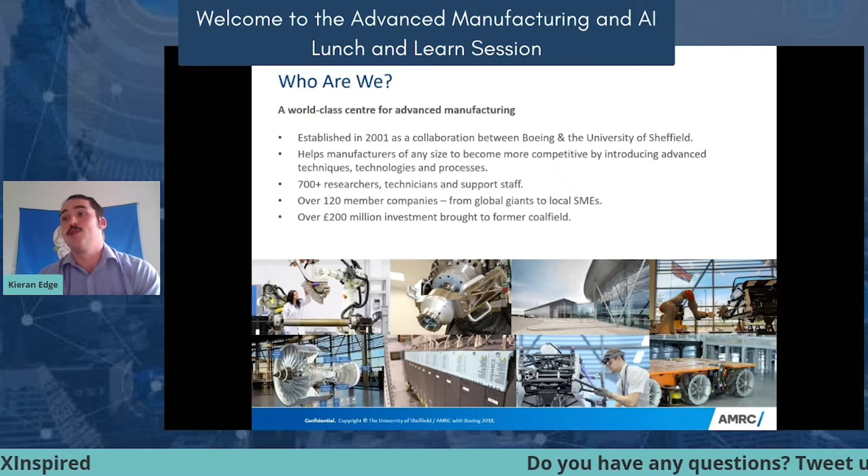We have over 700 researchers, technicians, and support staff, so a relatively large research centre. We have over 120 member companies, and we bring in over £200 million of investment to this former coalfield. It's Orgreave where we're based, so where the miners' strike took place, we reinvigorated the area and brought in new investment, new employers, and new research. We are also part of the Rolls-Royce and Boeing Global Research Network.

So this is why I want to give this talk today, because we collaborate with all these different companies doing all sorts of different applications in a wide range of industries, and we get a lot of feedback from these members as a part of it. So it's basically a dialogue, and what we've learned from this is what high value manufacturing and what advanced manufacturing wants, in terms of AI and in terms of machine vision.

So that's what I want to talk about today, because the purpose of the AMRC is to aid UK manufacturing. We're a not-for-profit organisation. We're here to allow manufacturing in the UK to grow and to develop and to become more advanced and more competitive.

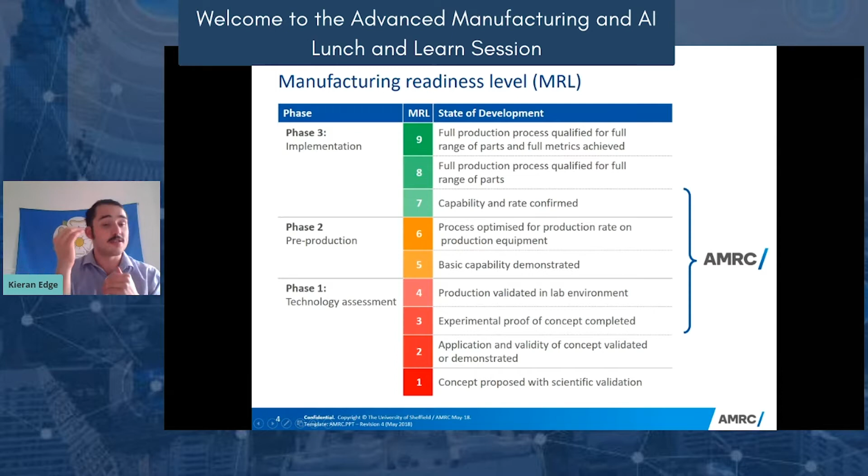And the way that we do this is by sitting in this sort of area here, as you're seeing in this slide. We sit in the gap between experimental proof of concepts in laboratories, so a technology being trialled and saying this is where we're at, is pretty much proven in a laboratory setup. And we're taking it through those next areas, so taking it through levels 4 to 7 in terms of making it more and more mature until it's ready to actually go into industry. That's where we work at.

And the way that we do this is by linking up with academia and with industry. So we'll have this low-level technology coming from academia and say, look, we're looking at doing synthetic data, for instance. We'll do R&D, we'll do proof of concepts, and then we'll work with system integrators, we'll work with software suppliers, and we'll work with the end users and industry in order to make the technology a perfect fit, in order to get it in there as quickly as possible.

So that's a bit of an introduction to who we are at the AMRC, what sort of experience and feedback that we get. And I'm going to go into the actual detail of that, and what high value manufacturers want from machine vision and AI.

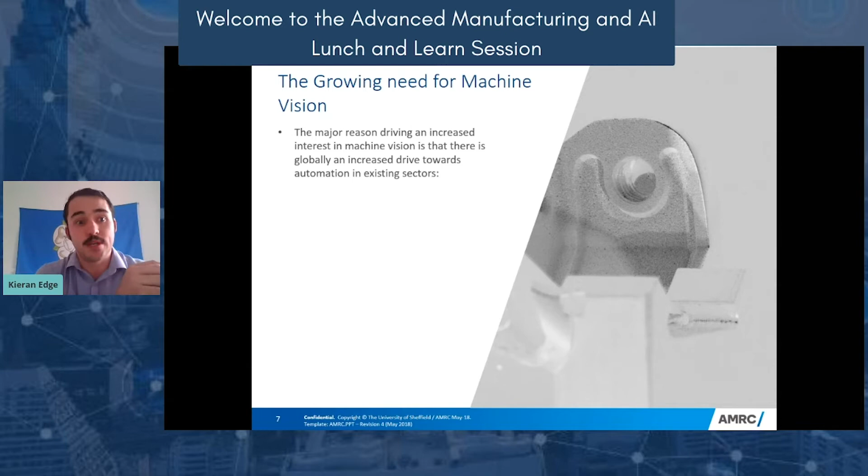So it's been widely acknowledged in recent years that there's a growing need for machine vision in advanced manufacturing. The major driving reason towards this is because we need to automate more in order to be more competitive. There are a few existing sectors where we're seeing massive increases in the desire to have machine vision.

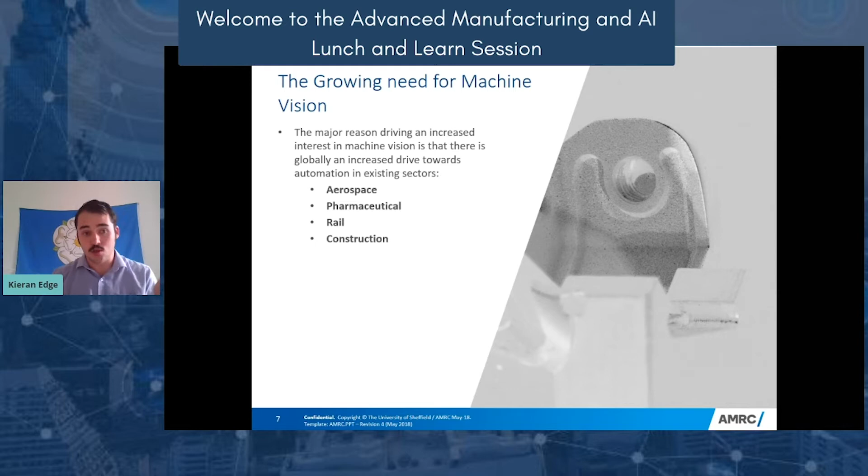So aerospace is one, the pharmaceutical industry is another, there is the rail industry, and there's also construction. So these four industries, we're seeing huge uptakes in the use of machine vision. There will be other industries, but these are existing ones where they want to apply more and more machine vision and AI techniques to their existing processes.

So these new sectors that we're seeing a lot of interest in at the moment are additive manufacturing. Additive manufacturing is seeing a huge increase in interest in using machine vision and AI to automate a lot of the inspection processes and in situ monitoring processes to make sure it's perfect first time.

Autonomous vehicles are growing in terms of use in public environments such as roads, but also in factory and manufacturing environments such as AGVs for moving robots and equipment around facilities. There's a very large increase in the desire to have autonomous vehicles in a lot of production processes right now.

And composite materials, carbon fiber weave, huge growing area of interest. Carbon fiber is quite difficult to image a lot of the time because it's so black and absorbs most of the light coming into it. There's a very big desire now to be able to automate that inspection. At the moment, Airbus with the A350 is predominantly made of composite materials.

53% of the airframe of an Airbus A350 is made of carbon fiber, and they need to be able to inspect this at rate in order to monitor how it's performing in real time, to produce more, to reduce costs, and to reduce the lead time to produce their aeroplanes.

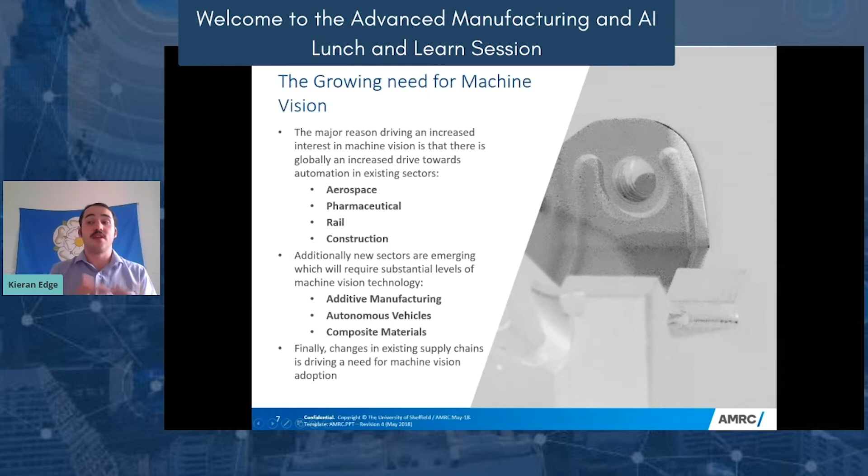So finally, there are changes in the existing supply chain which are driving a need for machine vision adoption. I'm going to talk about that a bit further. But let's think about what high value manufacturing actually want when we introduce a machine vision solution.

They want the solution to be flexible. They make small batches of a wide range of components, so they'll make lots of different things in small quantities. They want machine vision solutions which can adapt to these different applications, whether it's inspecting different components or looking for different features of interest. I've got an application later in this presentation which shows exactly what we're trying to do in terms of these flexible machine vision systems.

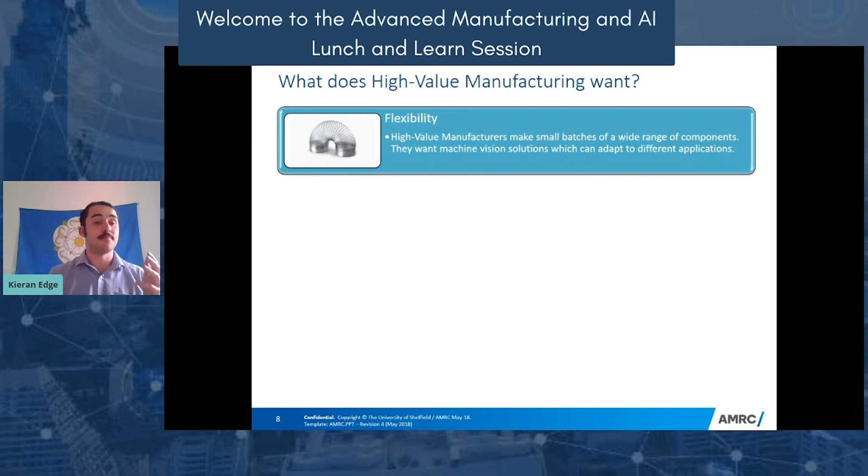They want their systems to be scalable. Because of the sheer variability in scale and shape of their components, they want a machine vision system which can image a lot of different components rather than an individual system for every single different type of component, because space and cost are at a premium in high value manufacturing and there isn't time to make bespoke solutions for each component.

So they need to be scalable, flexible, and they need to introduce traceability. This is becoming increasingly prevalent in high-value manufacturing - being able to trace the life cycle of a component through its production and when it goes off into service. So seeing, for instance, a turbine blade when it's cast, when it's in its wax mold, when it's being polished, when it's being deburred, after it's been in the acid bath, and then monitoring it in its life cycle to see how it decays. This is a big area in high-value manufacturing.

And finally, they want validation. They want to be able to say that this system will definitely work. A lot of the time these technologies are integrated for safety-critical operations, and you need to say with almost 100% certainty this system won't fail, or if it will fail, it fails safe. It won't send anything bad off into the sky or into production or into a building - it will only ever fail safe and scrap good components. So you need to validate that and have that certainty.

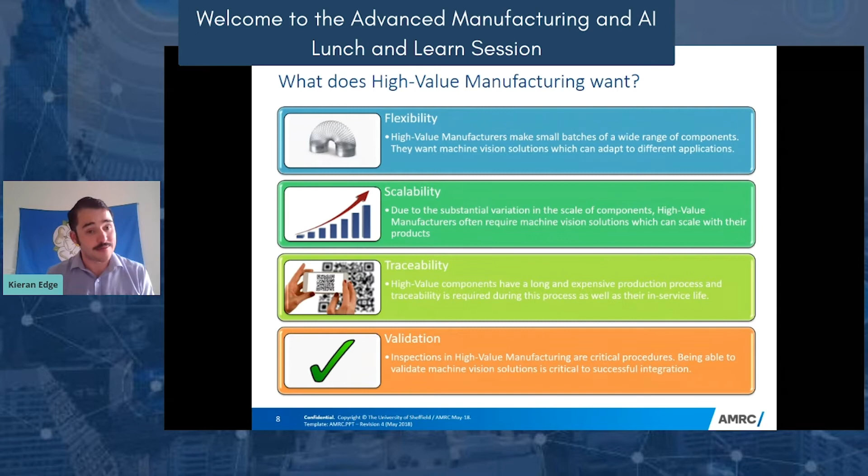So there is a huge drive now within the UK to bring supply chains inwards. Can we compete with China? We can't compete with China in terms of the cost of labor, the cost of materials, what they actually do. So we need to look at more advanced ways to bring these supply chains internal. That's what we're trying to address at the moment at the AMRC, and that's what we want to work with people on now. Supply chains are spread out that long in order to reduce the cost of production.

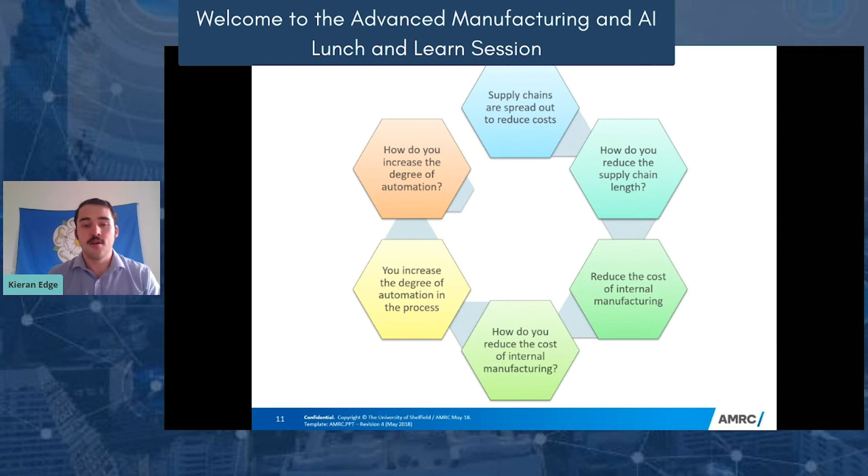How do you reduce the supply chain length? You have to reduce the cost of internal manufacturing. How do you reduce the cost of internal manufacturing? You increase the level of automation in the process, the amount you can do autonomously. How do you increase the degree of automation? Machine vision, to enable you to do more complex tasks and more operations in a shorter period of time.

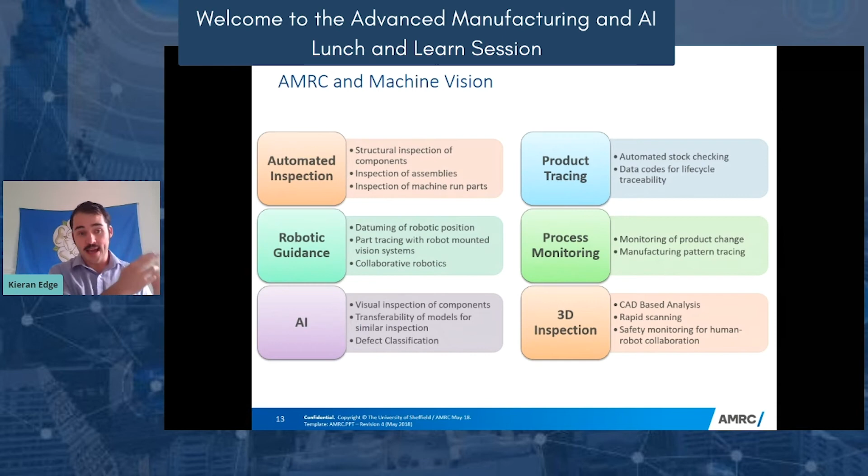Now, how do we operate? These are just a few of the areas we look at: automated inspection, looking at assemblies, inspection of components and put-together parts, product tracing, robotic guidance, process monitoring, AI is a massive area, and 3D inspection. We're looking at all these areas to see how they can help the supply chain in this country, how we can transfer this knowledge into industry. We're looking to work with partners, end users, system integrators and suppliers to develop these technologies and put them into industry.

So I'll quickly run through a sample application we've done with a partner. This is with a large aerospace partner looking at the inspection of complex fabrications, complex sheet metal components. What they wanted was basically what I set out earlier: they want a system which is flexible, so it can inspect a wide range of components and look for a wide range of features using the one system.

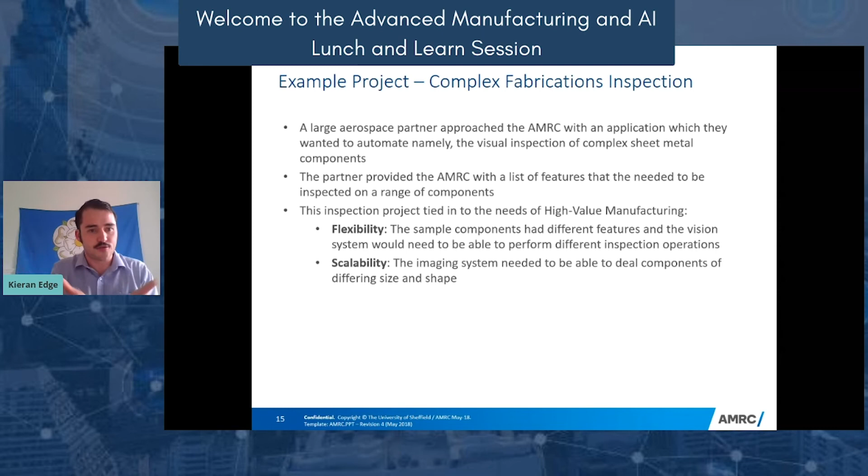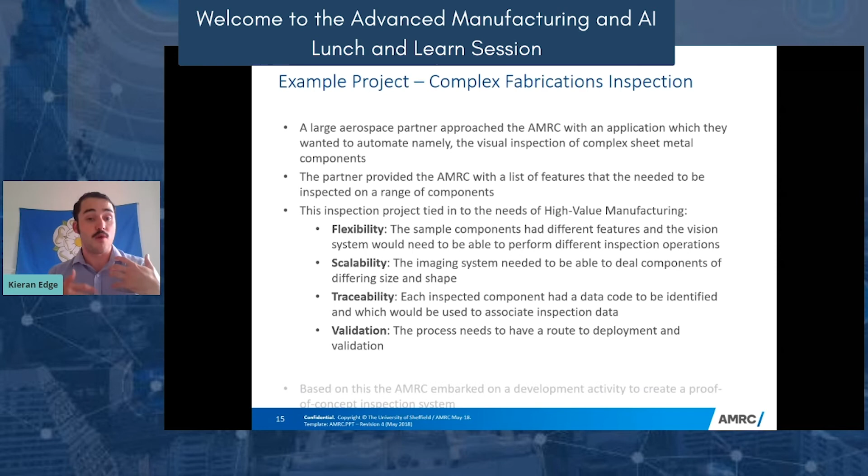They wanted it scalable so it could adjust to different size components coming into the inspection area. They wanted it traceable, able to read the data code and part code to see how it performs over its lifetime. And they wanted to be able to validate the process to see how it can be deployed and validated and sent into production. Based on this, we developed this proof of concept system.

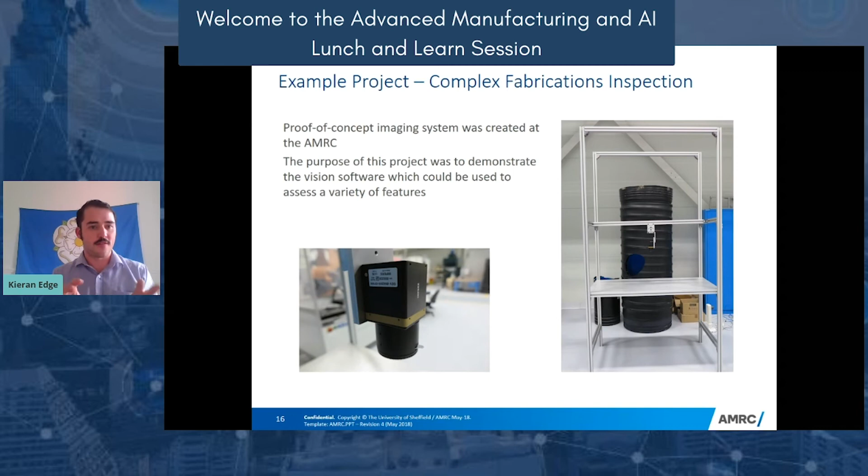And we were inspecting for a wide range of different features. We were looking to check spot welds, checking that they were all in the correct location. We were doing data code reading. We were looking at countersinks, can we identify them. We were doing dimensional analysis of holes in these sheet metal components.

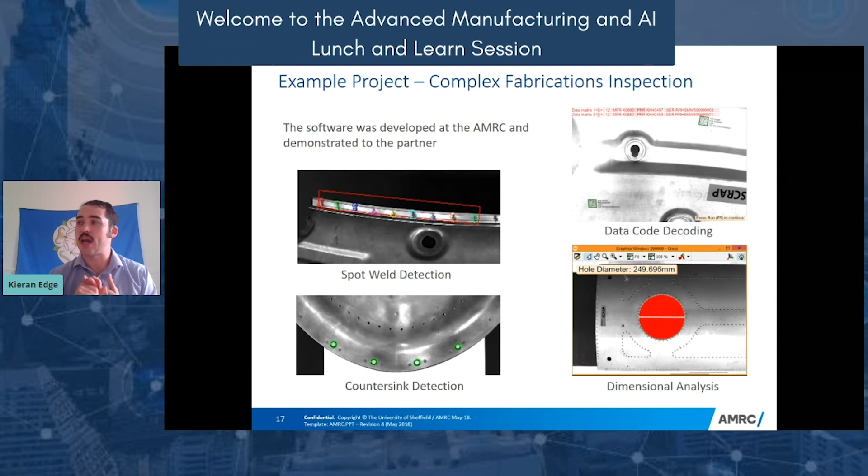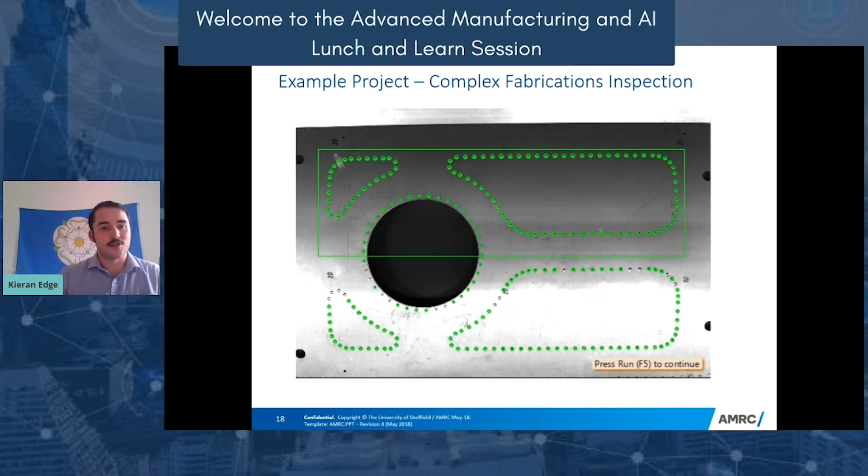And we were showing this all with one system, one computer, one program, showing that you can make these systems flexible, scalable, and look at different areas of interest. We can do counting and other things, identifying rivets in this field of view, seeing how quickly you can actually do these inspections. This was performed in real time, looking at these sheet metal components, finding these features, showing how we can do this very, very quickly.

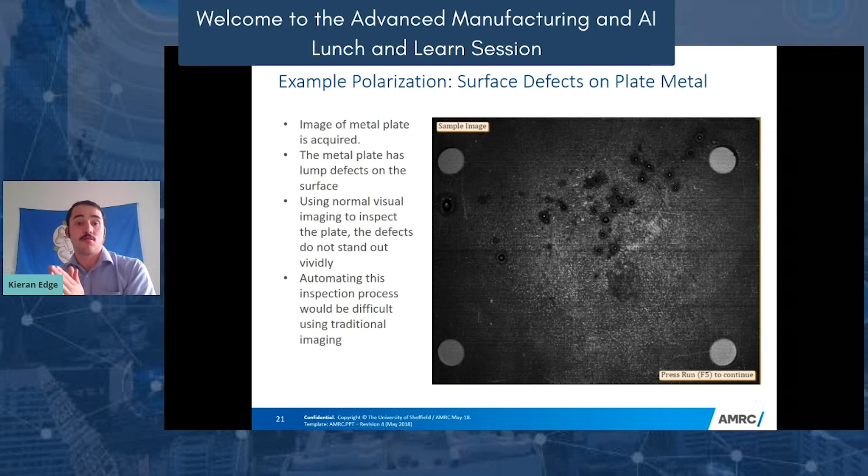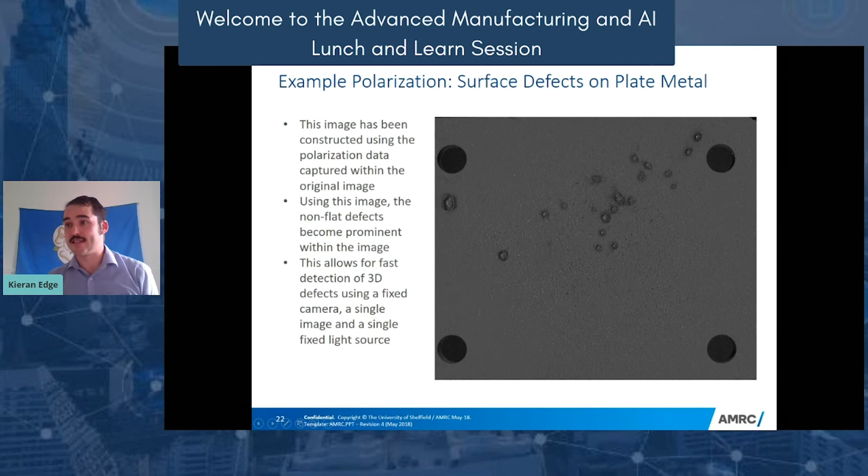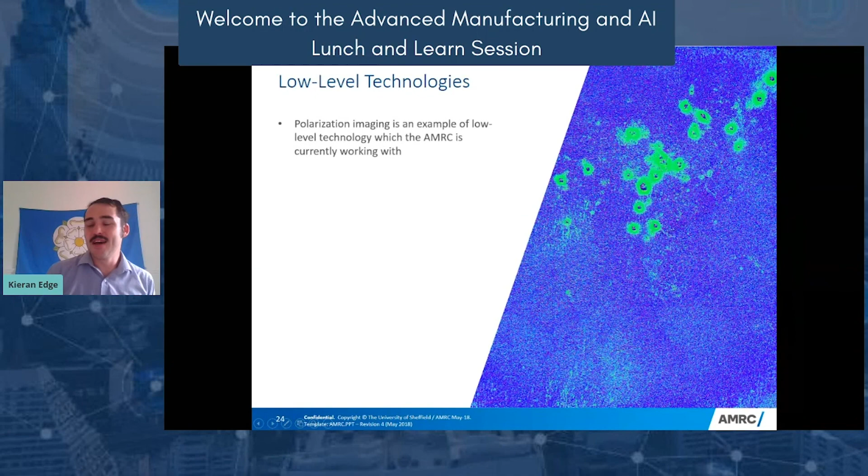Then using machine vision and AI in order to highlight these defects as well. All these applications I'm happy to discuss further, and my contact details are available, so do get in touch if you want to discuss this further, but I'm slightly pressed for time here. We work in low-level technologies, we look to take these further, develop it further, and actually work with system integrators and end users to integrate it.

So, working with the AMRC: the purpose of the AMRC, as I've said, is to aid UK manufacturing, and we're always looking for partners to work with. This can take a variety of forms. We can collaborate on projects together to deliver production-ready solutions. We can demonstrate technologies to our partners if we think that looks valuable. If you have a product that looks good, we can demonstrate it to Boeing, Rolls-Royce, Siemens, Spirit and all these different people. And we can allow for networking to see how we can get this technology into advanced manufacturing.